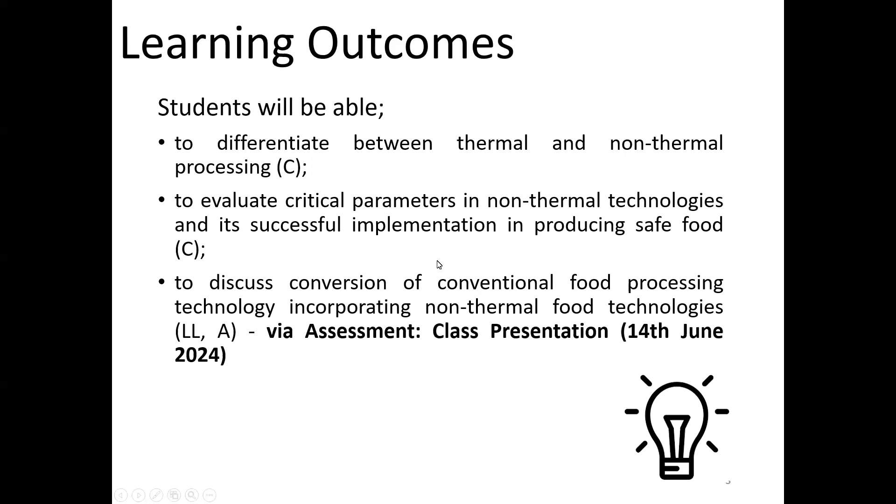Okay, so this will be done via assessment. I could share with you the presentation that you need to present on the 14th of June, which is basically the future outlook of non-thermal processing in Indonesia. Because I'm not quite familiar with the industry in Indonesia at the moment, it would be very good knowledge for me to understand how the food industry in Indonesia is and how you could implement non-thermal technology within conventional food technology.

Okay, so you have to choose first the non-thermal technology you would like to focus on, and what the important parameters would be. Then you have to give me a specific example. Let's say if you were looking into a juice factory or some other food industry, that you are able to convert from the conventional thermal technology into a non-thermal technology. So please also include a food processing flowchart. This would be very good.

I would be able to understand better, and you and your friends would also be able to understand better. And of course, you can relate the proposed technology to solving food security in Indonesia and how to promote this new technology to Indonesian consumers. So the class presentation is not on the 9th, it is going to be on the 14th.

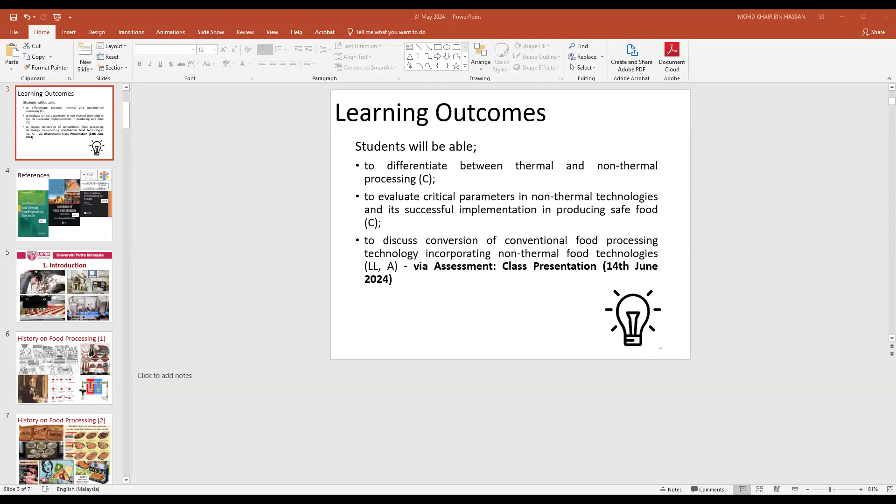For today, besides that, these are basically my references. The latest reference is the Handbook of Food Preservation by Mohammad Shafiur Rahman. It's the 3rd edition, so you could try to find it online and read it if you are able to. Other than that, I refer a lot to Prof. Chauhan's books on non-thermal food processing, and of course Enrique Ortega-Rivas. So these are my references.

So as an introduction, basically what you are looking at is the newest technology that we have in the food industry. But a disclaimer here: in Malaysia, the majority of owners in the food industry are small and medium enterprises, about 60 to 70%. So needless to say, small and medium industries use very conventional food processing.

They use simpler methods. They use a lot of cooking, because they lack the capacity or the financial ability to incorporate newer technology, and they also lack experts in this field. So what you are looking at is a lot of food industry in Western countries, especially the United States, which has incorporated non-thermal food processing. They invested a lot, they have the financial means and capital to invest in this technology, and of course, they have experts for it. Okay.

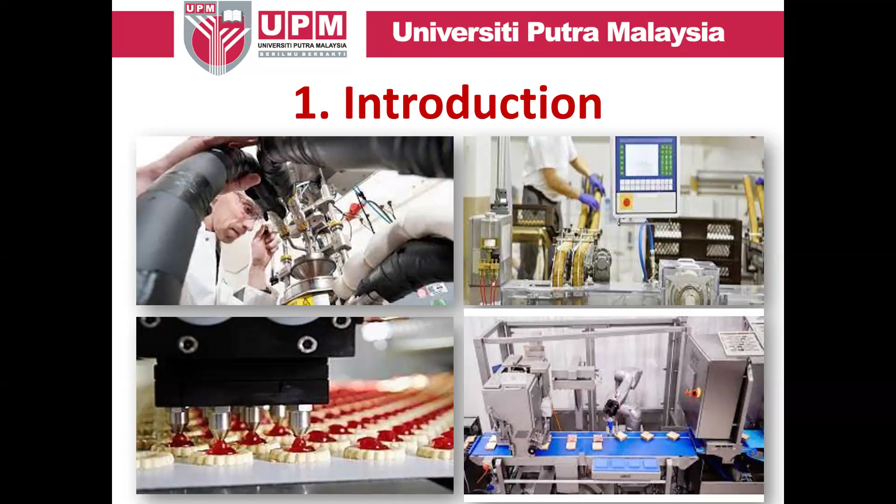Before we go any further, I would like to discuss a bit on the history of food processing. The origin of food processing may be placed in ancient Egypt, as shown by this figure. The writings on the wall show how they symbolize the history and culture of food processing. Basically they would use crude processing methods where you slaughter your animals and then perhaps sun dry them, or use salt, or fermentation. It's not only in Egyptian civilization but also in Roman civilization, Chaldean, China, and Greek civilization.

So modern food processing, as you can see this guy here - this is the grandfather of pasteurization, Louis Pasteur. He came up with the new technology of pasteurization of food, especially during the earliest invention which was on milk pasteurization. That is why you could see the word pasteurization usually connected to milk processing. This was actually found in 1862, so it's quite far off, right?

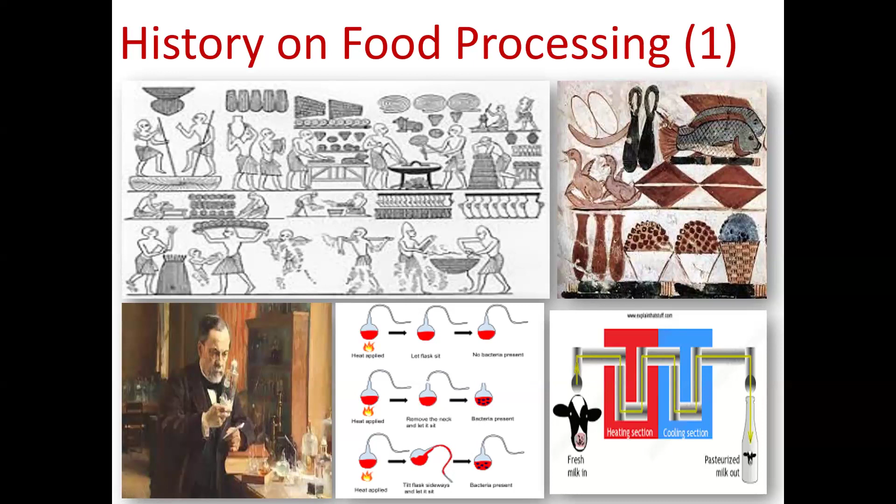And then of course we move into the advancement of the 21st century. You see a lot of pasteurization products. You see also ohmic processed food, eggs that are being pasteurized, although we sometimes wonder.

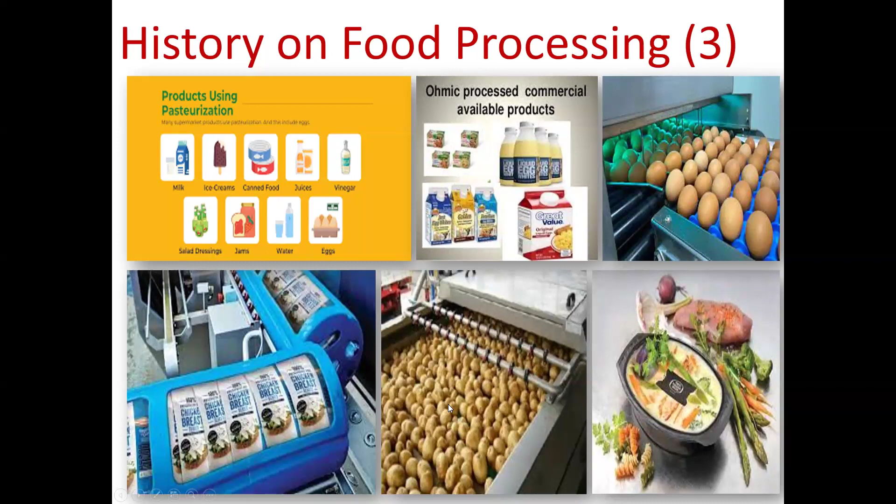And then this one here is actually a barrel vessel - we put in packaged product for HPP, or high pressure processing. And potatoes here are being treated with infrared, now with pulse electric field. So there's a lot of advancement that has been done.

So if you look at food pasteurization, the earliest forms of food pasteurization are basically using heat. So when we look at pasteurization techniques, there are three: low temperature pasteurization, high temperature pasteurization, and of course ultra pasteurization.

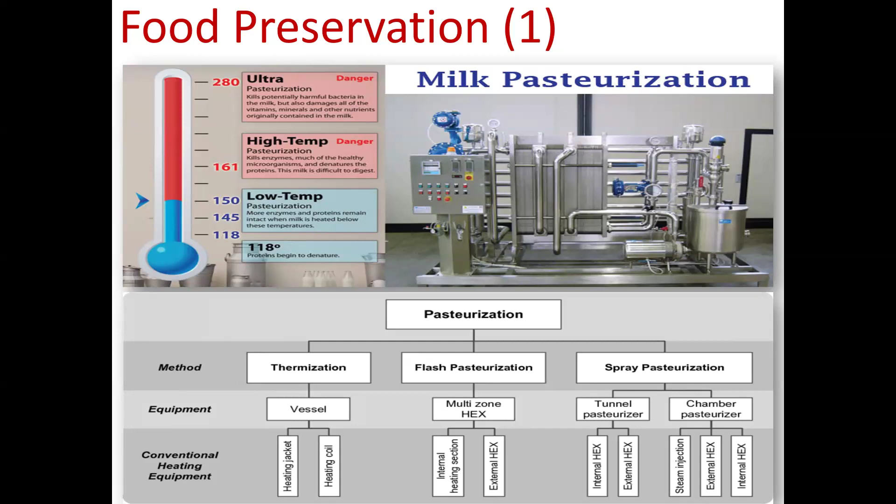Of course, when you look at ultra and high temperature, you would have safe food, but the nutritional quality of it is degrading. If you look at high temperature pasteurization, this milk is difficult to digest because the protein has been denatured, so your stomach cannot digest them. That is why newer technologies have come in to help with this pasteurization method.

If you look at food pasteurization methods, there are three major techniques. One is inhibition, meaning you kill all the microorganisms, you inhibit any growth of microorganism. Inactivation, you just kill them for a while, make it dormant to a minimal level, but still safe for food consumption.

And of course, if you want to avoid recontamination, you would have to have a very good food safety management system. The ones I'll be discussing for this week and next week's lectures are basically irradiation, electrifying measures, pressure treatment, light, sound, and of course the magnetic field.

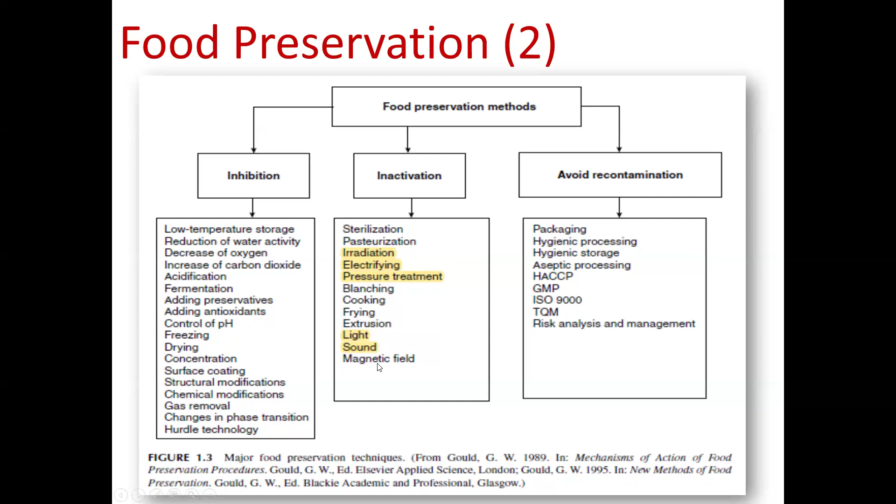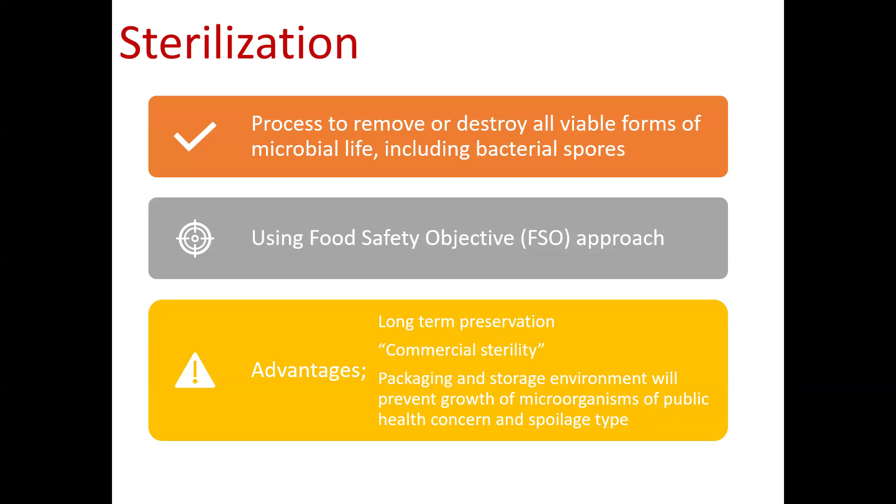So these are basically sterilization methods, to remove or destroy all viable forms of microbial life, including the bacterial spore. We have always used the food safety objective approach. Basically, after the sterilization methods, we test for any microbial growth.

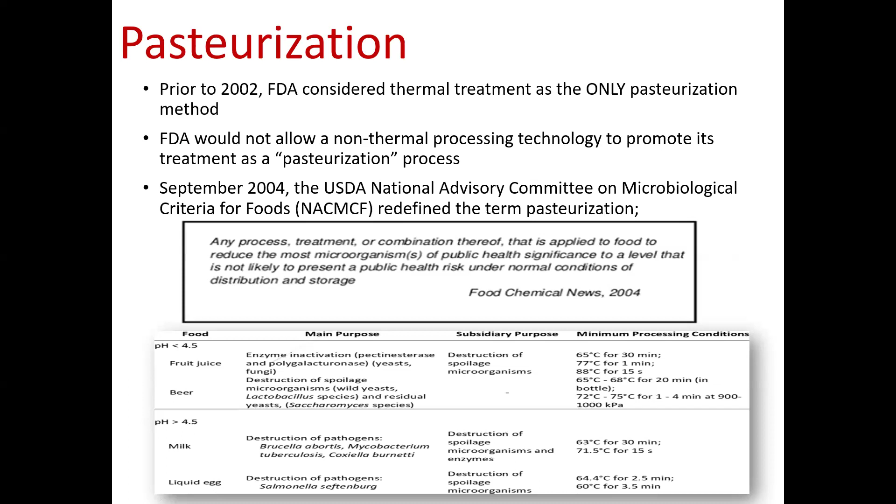So these are basically the pasteurization methods. Prior to 2002, only heat or thermal pasteurization was considered the only pasteurization method. But after that, they have considered non-thermal methods, such as ultraviolet, ozone, irradiation, and other types of pasteurization.

Ultimately, what we want is food that is safe, but the nutritional quality is still viable. We still want all the nutritional quality that is within the food itself. So less processed food is especially in demand nowadays, because our consumers are more educated, so they understand the nutritional quality better.

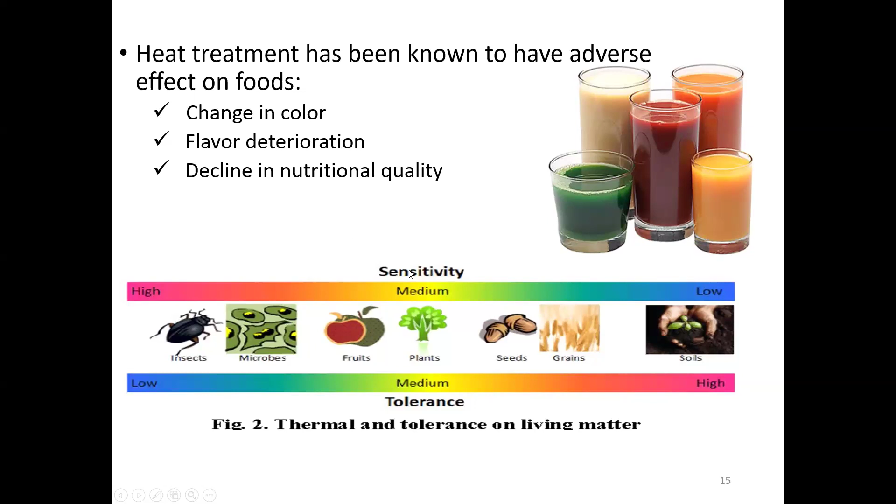And of course, you don't want any adverse effects. You would like your carrot juice to come out as orange as it was before. You don't want any change in color, any flavor deterioration, or decline in nutritional quality. That is always the issue with thermal treatment.

So functional food is a byproduct of this non-thermal approach. Sometimes we call it functional food because at times all these bioactive compounds are extracted together - that's a side effect of non-thermal processing. That's why non-thermal is the way to go now, because you not only produce safe food, you also retain the nutritional quality, but at times you can have extra nutritional benefits to your food.

So it is an increasing trend worldwide, even in Malaysia. Consumers are moving towards a better lifestyle and good health. When we look at the purchase intention of our consumers nowadays, they like to see the health part of the food, the perceived value they are buying, and the food safety concern.

That is why when food has a GMP logo, or a HACCP logo, those are seen as higher quality products, so that's why they would buy it. And of course, there's also the religious factor.

For this week's lecture, I will only be covering ohmic heating, infrared heating, and radio frequency. I will not be discussing microwave, but every now and then microwave will be included into the discussion as a comparison method to these methods.

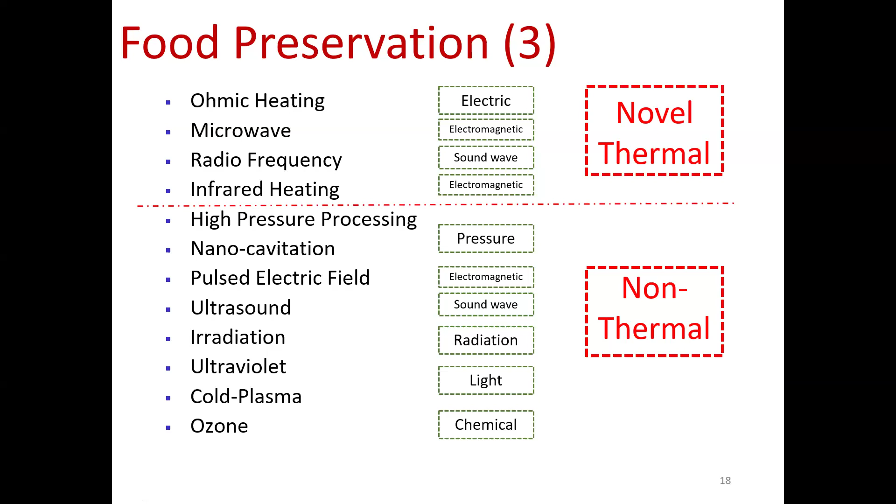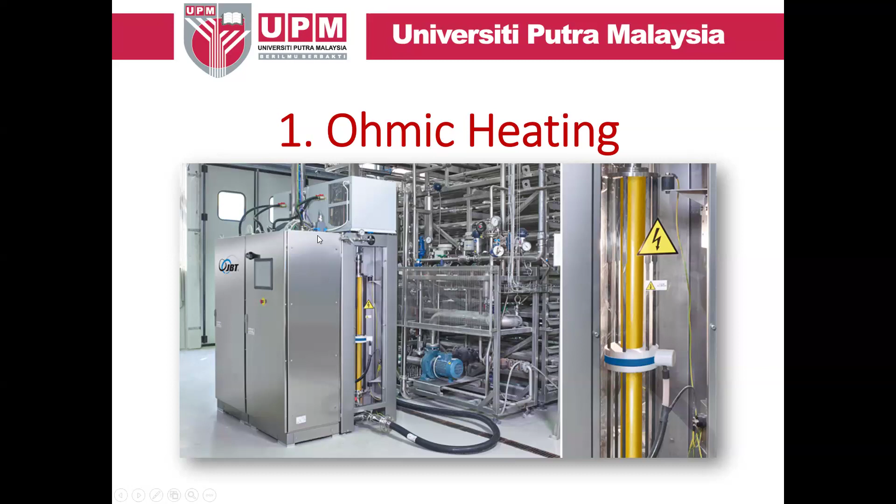So the first topic of the day is actually ohmic heating. This is the industrial setting of ohmic heating - basically this is the pipe, they will put the electrode here to treat your food products. If you look at all of this equipment, the very crucial part is only the yellow pipe here. That is how ohmic heating is used to treat your food product.

Before I go on any further, I would like to actually compare the heating methods. If you look at the conventional heating method, the energy is transferred through the wall of the reaction vessel.

If you were to have your pans, your cooking pots, you put them on top of your gas, and it will emit fire. The fire is actually heat energy that will be transferred from the fire itself to your cooking pots, the wall of your cooking pots, and then the energy itself will dissipate through your food product.

That is a very direct heating method. But if you look at microwave irradiation or microwave heating, it's basically the direct and internal absorption of microwave radiation by the molecules itself. So that is why your food product needs to have water in it, for it to be able to absorb all this microwave energy and for it to dissipate in terms of heat.

If you look at the inductive method, this is the induction method, which is basically what we call an indirect heating method. You would have an alternating field, alternating current, or alternating electric current field, and then it will produce heat that goes to the wall of your cooking pot. So in comparison, conventional is considered a direct heating method, induction is considered indirect heating.

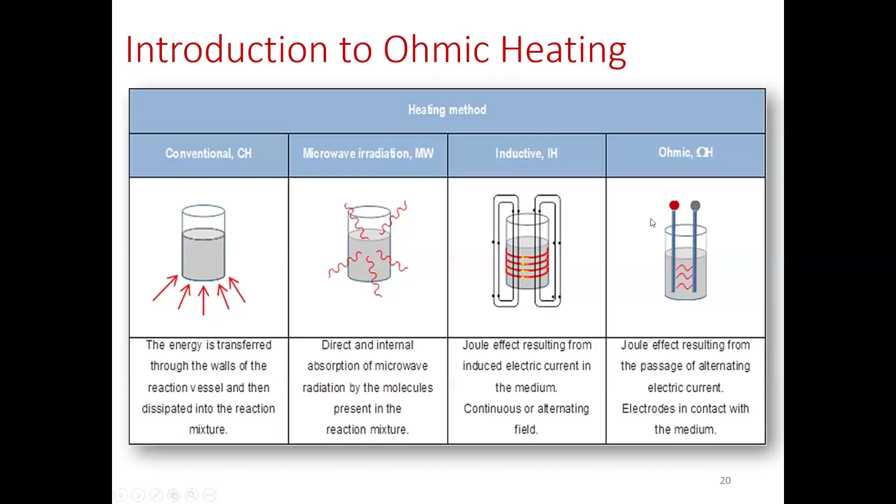The advantages of ohmic heating is that it's most often used for a liquid product. Let's say you're cooking chicken curry, or if you want to heat up your pot of water, it's very good to use ohmic heating, where the electric currents can be generated and passed through your food, so that heat can uniformly go to every molecule of your food product.

Temperatures are sufficient, and it can also produce ultra high temperature, but without the degradation of nutritional values, just like the ultra high temperature method does. That's why ohmic heating is much preferable in comparison to UHT.

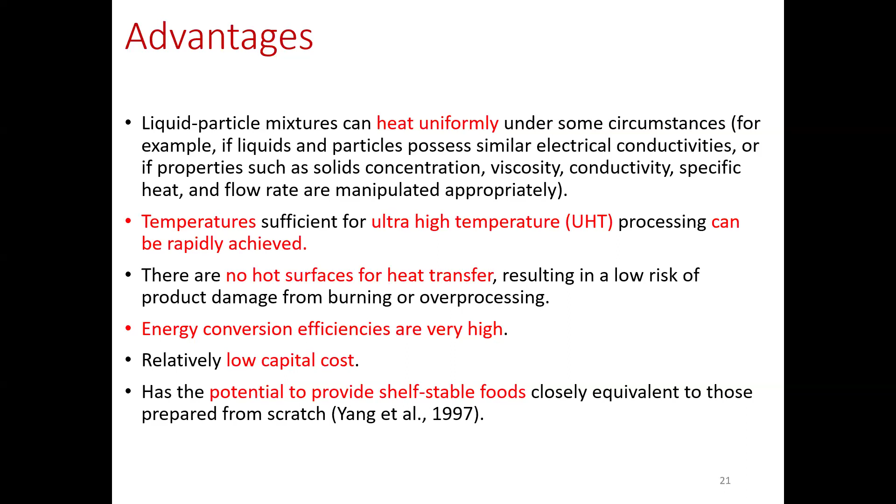No hot surfaces. If you were to compare to microwave, most often you would have cold spots in your microwave food product, but using ohmic heating, you would have sufficient and uniform heating, resulting in a low risk of product damage from burning or over-processing. The energy conversion efficiencies are very high, you have relatively low capital costs, and it has the potential to provide shelf stable food.

How to design ohmic heating? Basically you need to have two electrodes, a power source, and of course a means to confine food samples. So basically you either have a vessel, cooking pots, anything, so you can use it.

Important design consideration: you need to have an electrode configuration. Let's say you look at this figure on the right here, you would have two electrodes. If the electrodes are moving closer to the middle part of the food, everything in the middle part would have a very high efficiency rate, so the heating rate will be higher and faster. That's why electrode configuration is very important.

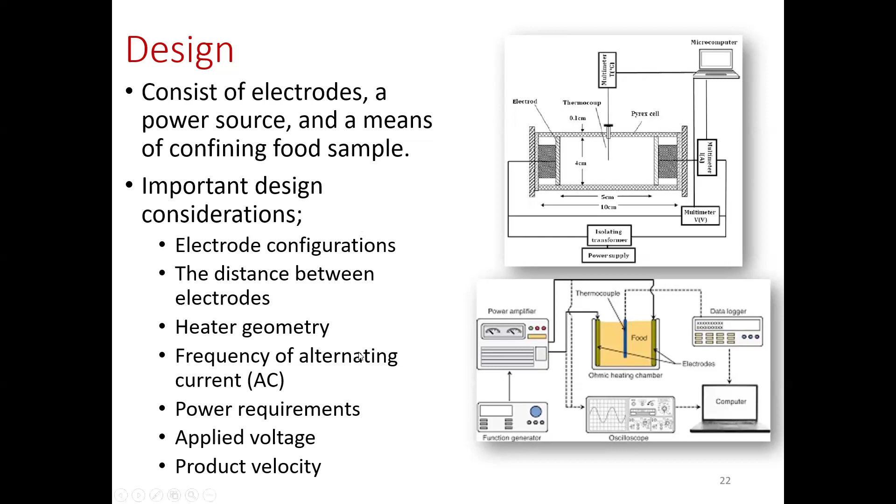The distance between these two electrodes, the heater geometry - you could have maybe instead of two, maybe four, or maybe six if your pots are very big in dimension. Other than that, the frequency, the power, and the voltage of your electricity generator would be very important. And it's not product velocity, it's actually product viscosity - the thickness or viscosity of your product will play a very important role in making sure you have an efficient heating method.

Important parameters, as I've mentioned before: product properties, electrical conductivity - these are very important - density, specific heat, and of course the viscosity. Type of product matters too: liquid would fare much better with ohmic heating in comparison to solid, because you need very good electrical conductivity, so your food should be able to move the electrical current within itself. That's why ionic components, salt components, and water components are important in your food product for the electric current to move about.

Fats, lipids, and alcohol will decrease the efficiency, or will decrease the electrical conductivity of your food.

So electrical conductivity is linearly correlated with temperature. So when you have a very high electrical conductivity, you will also have a very high temperature. But by lowering the frequency of alternating current, you can also increase the electrical conductivity of your food.

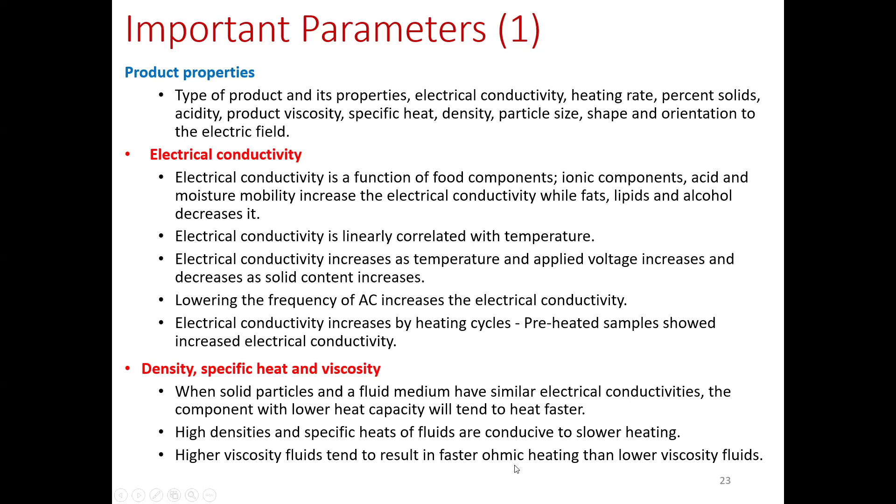Okay, so when solid particles and fluid medium have a similar electrical conductivity, the component with lower heat capacity will tend to heat faster. So let's say if you were to have tomato sauce and water, water would have a very high electrical conductivity, so it will heat up very fast in comparison to your tomato sauce. So high density and specific heat of fluids are conducive to slower heating, and higher viscosity fluid tends to result in faster ohmic heating than lower viscosity fluid.

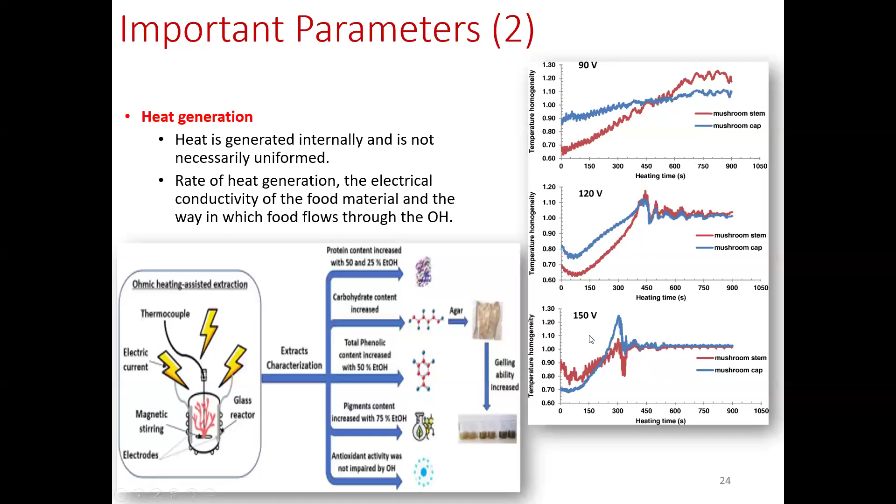Right. So this is one example, if you want to look at the heat generation. This one is at 90 volt, this one is at 120 volt, and this one is at 150 volt. You could see at 90 volt, the increment of temperature or the temperature homogeneity is a bit constant and a bit slow moving. But when you have a higher voltage, about 120 volt, there's a peak over here and it's quite fast. And if you were to compare 120 and 150, this one is much faster. So if you want a faster heating rate, then you need to increase your voltage, right?

So how do we do this? Actually, how to make sure your ohmic heating is homogeneous or uniform heating is basically by modeling it. This is by using a computational fluid dynamics software. So you could see whether there's a cold spot or not.

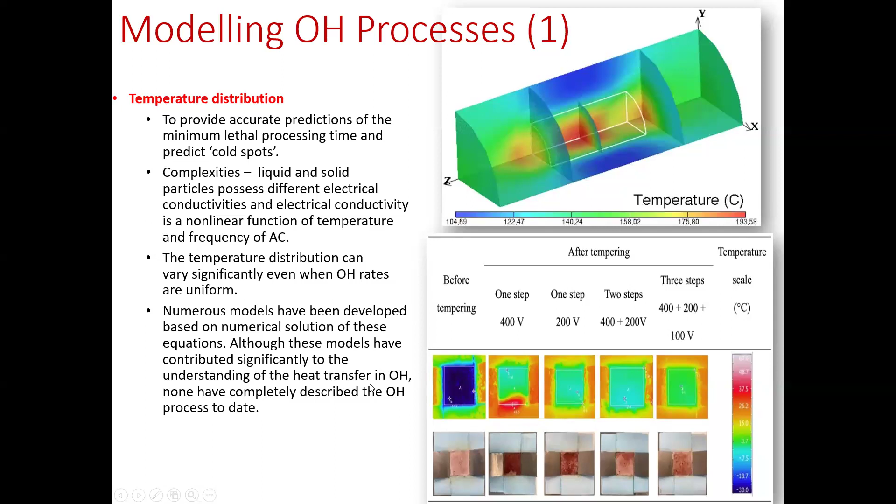So the complexity of ohmic heating, the issue is that if you were to have food that has different electrical conductivity, then you would have an issue of getting a uniform heating, right? So numerous models have been developed, but the understanding of how ohmic heating plays a role in your food cooking is still very small. Okay, so we need a lot more research to do.

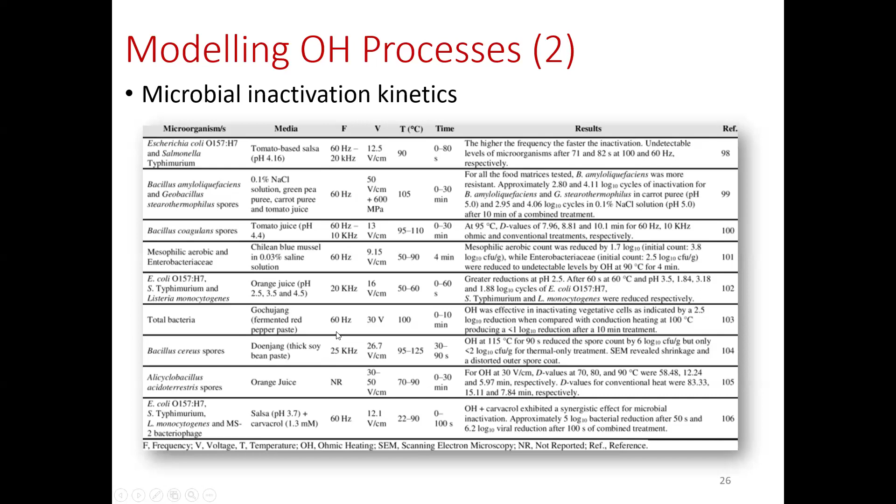Okay. The very important thing is to also eliminate any electrolysis. Electrolysis is actually what happens with ohmic heating at a high voltage. The electric current itself can cause electrolysis. So electrolysis involves movement of ions towards electrodes of opposite charge. So cations towards the cathode, and anions toward the anode, right? So the cation is actually the positive charge and the anion is the negative charge.

So when the electric current passes through the food, which contains water and dissolved salt, these components can undergo electrolysis, resulting in chemical reactions at the electrodes. So the issue here is that it can lead to chemical changes in food. It can affect the flavor, the color, nutritional value. The issue is oxidative, okay?

So usually at the anode stage here, it can produce oxygen that can cause lipid oxidation. And the cathode itself can sometimes produce hydrogen ions. And this will also affect the taste of your food product. So electrolysis can generate potentially harmful substances such as chlorine from salt, if not properly controlled. Electrolysis can also lead to degradation of electrodes that can contaminate your food with electrode material.

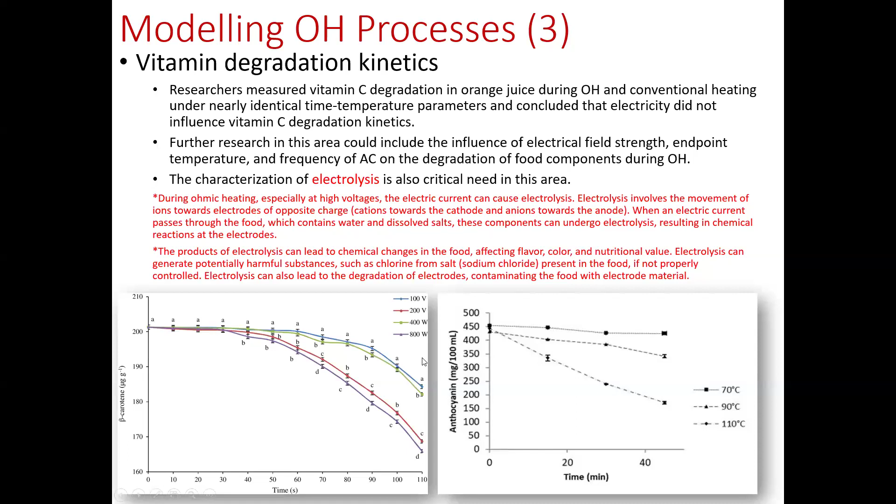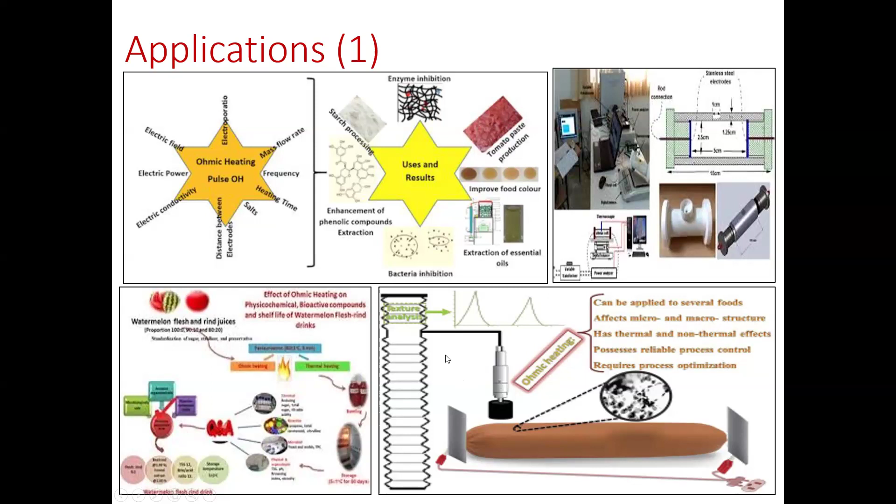And another usage of ohmic is you can use it as a sensor. So in this product, let's say if you were to have a sausage here, it can be applied to several foods and can affect the micro and macro structure of your food. So this can be detectable using texture analysis. Okay.

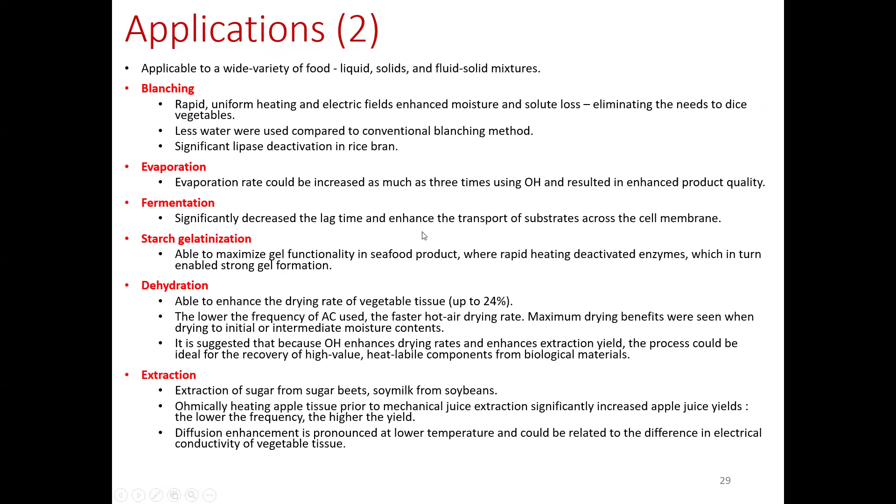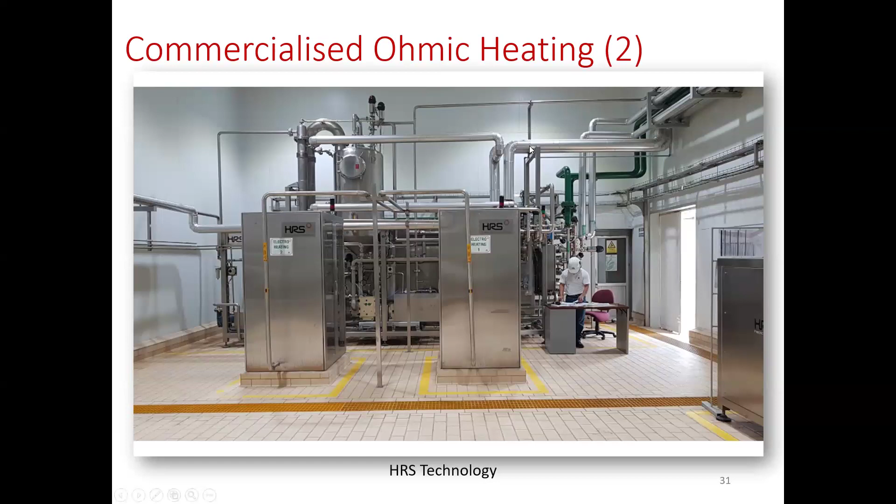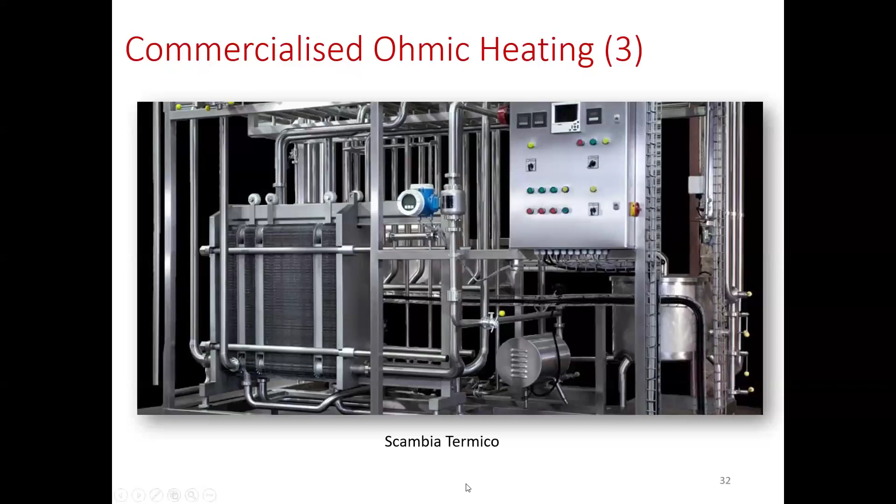Okay, and the future research direction is basically you need to find the optimized temperature and heating time. And of course, you also need to develop temperature measurement that is non-invasive and does not interfere with the electric current. The issue now is the data logger of your temperature measurement. You cannot put it directly inside your cooking vessel when the electrodes are producing electrical current. Basically you would get an electrical shock.

So the issue is internal monitoring. We want to know the internal temperature. That is why modeling is very important now, but this is only a simulation. So you need to also develop models that correlate process parameters with the desired properties of the product, and to standardize ohmic heating.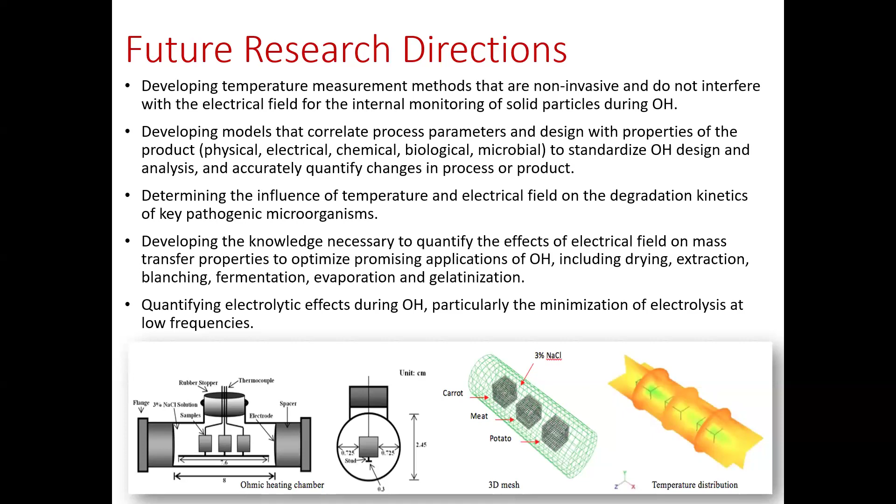And to determine the influence of temperature and electrical field on the key pathogenic microorganisms, and of course to develop knowledge necessary to quantify effects of electrical field on mass transfer. And you need to also identify if there's any electrolysis that happens during the treatment of your food product.

Okay, so the second subtopic for today is infrared heating. So what is infrared actually? Infrared uses electromagnetic waves. An electromagnetic wave looks something like this. You would have an electric field and it produces a magnetic field. That's why it is named electromagnetic. Based on the electrical current, it produces a magnetic field. Okay, so it is highly energy efficient.

It uses less water and of course is very environmentally friendly in comparison to conventional heating. It is characterized by uniform heating, high heat transfer rate, low heating time, low energy consumption, improved product quality, and of course, food safety. And infrared is used in a lot of food manufacturing processes such as drying, boiling, heating, peeling, polyphenol recovery, freeze drying, antioxidant recovery, microbiological inhibition, sterilization of grains, bread, roasting of food, manufacturing of juice, and of course, cooking of your food.

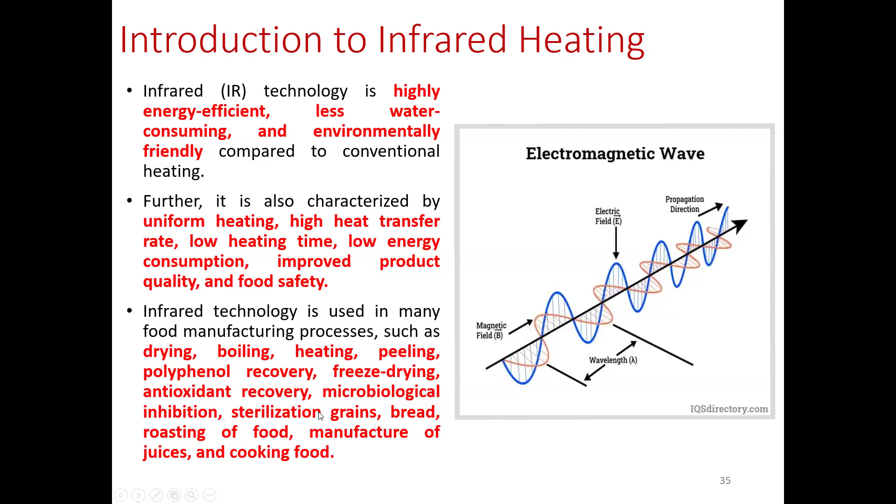So what is in the electromagnetic spectrum? If you look at this spectrum here, radio is somewhere around here. It has a long wavelength, so it has a very low frequency, and it produces low energy. But as you move further up to the gamma ray, this has a very short wavelength, because you can see the gap is closer to each other, and it produces very high energy and of course high frequency.

So where is infrared? Infrared is here. This is microwave. So infrared basically has a shorter wavelength in comparison to microwave. It has a higher energy and of course a bit higher frequency also. So if you were to compare ultraviolet, infrared, and microwave.

So basically with microwave, the ions or the water molecules inside the food product will rotate about each other. It would absorb radiation from the microwave itself, and then it produces high energy so that your product will move up and down and move about in your microwave. But for infrared, the water molecules only vibrate. Although it has higher energy in comparison to microwave, the vibration of this molecule produces higher energy.

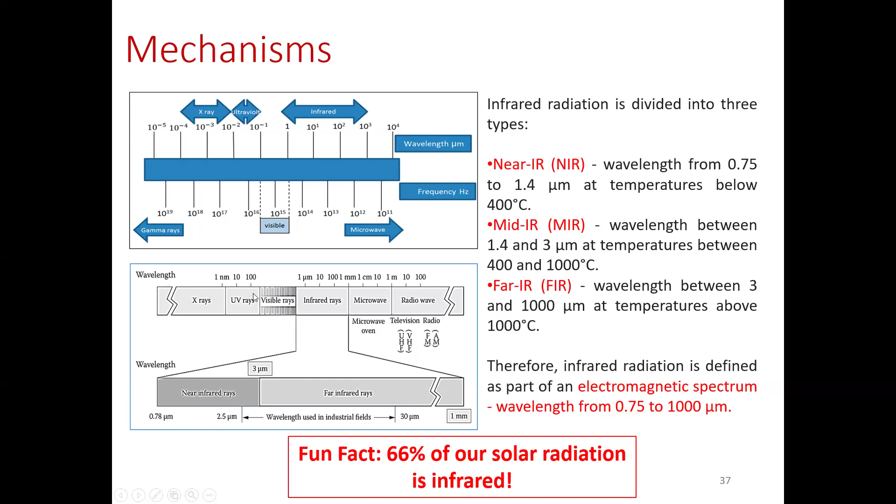So one fun fact is that 66% of our solar radiation is actually infrared. So what we are absorbing is basically infrared. And the rest, 34% of our solar radiation, is actually the visible ray and the UV ray. Okay.

So the mechanism is that the infrared will penetrate your food product, and then whatever water is inside your food product will vibrate. The vibration movement of your water molecules at a frequency of about 60,000 to 150,000 megahertz can cause heating. So the vibration of that movement of water will cause heating. Basically, what you will see is an increment of temperature, but it's not as high as microwave.

So electromagnetic radiation causes thermal movement of the molecules, but conversion efficiency is highly dependent on the frequency. That can cause electron chemical changes in radiation absorbing molecules, such as chemical bonding, electronic excitation, and dissipation of absorbed energy in the form of less heat. So what it is trying to say is that although you would have an increment of temperature, because of the vibration of the water molecules, as soon as it absorbs the heat, it will of course dissipate the heat.

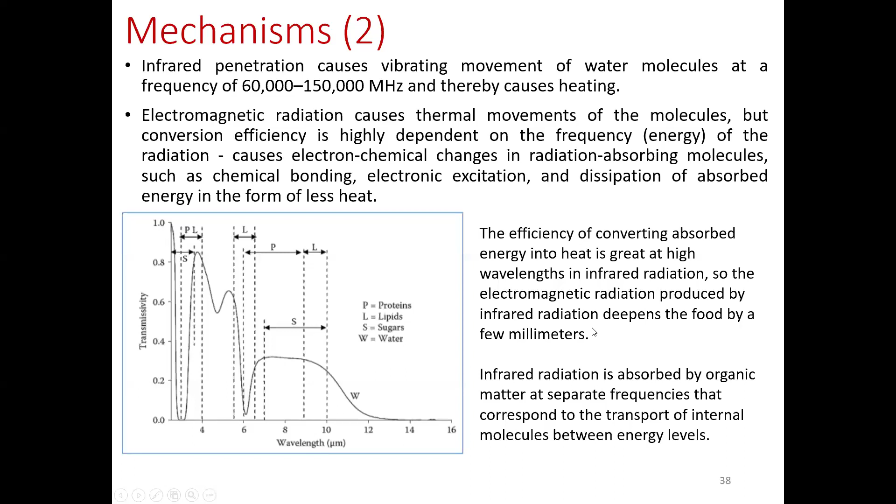So the efficiency of converting absorbed energy into heat is very great at high wavelength in infrared radiation. So electromagnetic radiation produced by infrared penetrates the food by a few millimeters in comparison to the microwave. If you could see here, if you have more water in your food product, it would absorb more. And as you have lipids, sugars, protein, protein has the highest, I think, absorption rate of wavelength, right? So strong absorption is due to the longitudinal vibration. Longitudinal means vertical vibration, up and down, up and down.

The radiation absorption of the material is not saturated, although it is still considered radiation, meaning whatever radiation is being absorbed by the water molecule, as I've mentioned before, as soon as it absorbs, it will dissipate to the environment as soon as possible. So it will transfer the energy to the surrounding environment. So it is only absorbed by a thin layer of organic matter and water. So heating is superficial, it's only on the surface of it.

So the process of infrared heating is faster because energy is transferred from the heating source to the food simultaneously. Therefore, you don't need any extra usage of hot air. So you don't need any transfer of your heat. Basically, water molecules will absorb and then release the heat.

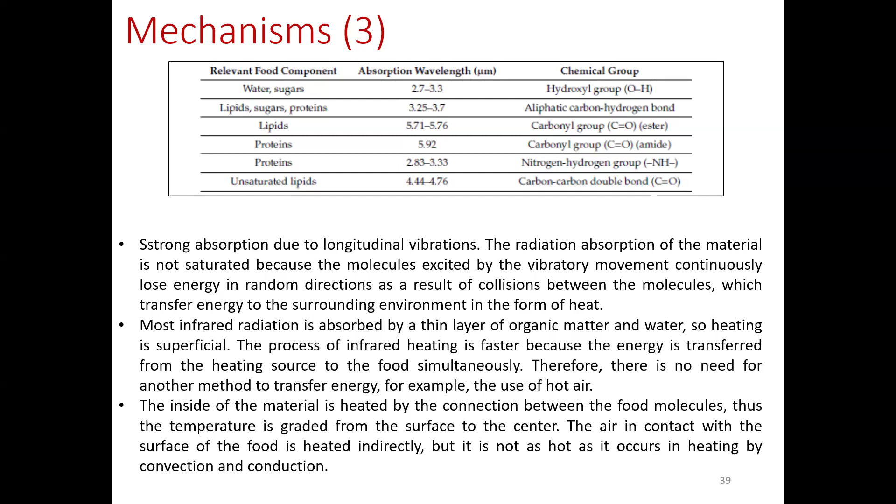Okay. So the advantages of it are basically, as I've mentioned before, highly energy efficient, less water consuming, environmentally friendly, very low energy cost, and the size of the infrared equipment is often very small, and the thermal efficiency is very high, so it is considered a valuable energy source. And as I've mentioned before, since the radiation is not saturated within your food product or the food molecules, it does not have enough energy to damage any DNA of your food. So you do not need to worry if you were to consume any infrared food.

So the energy is directly concentrated on the material to be heated and does not produce any volatile organic compounds, carbon monoxide, or nitrogen oxides. It does not need any heat recycling and does not need an isolated system. So basically, it preserves the vitamins, has very little flavor loss and no heating of the surrounding air. So it's very safe to use.

Okay, so the US FDA, the United States Food and Drug Administration, has indicated that infrared radiation can be used in food processing and it is not considered ionizing, right? And it improves the quality of the treated product, improves the safety, and reduces the consumption of chemicals and water, and of course improves the manufacturing efficiency.

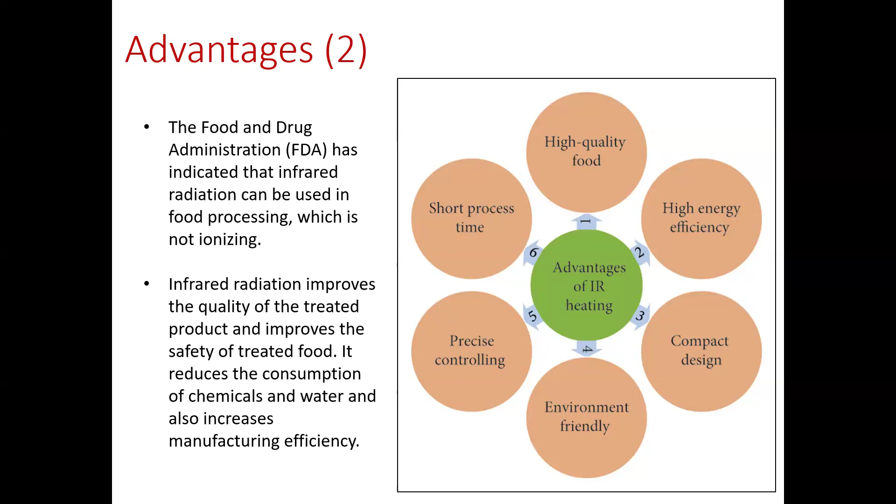Okay, so there are two traditional sources. One is the electric heater and another one is the gas heater. So the one that is very good for your usage is, of course, the electric heater, because it has a widespread wavelength, ease of control, fast heating rate, and clean energy. So the infrared that is produced is more flexible, and you can use it for any particular application. And infrared radiation can also emit wavelengths ranging from short to long depending on the voltage applied.

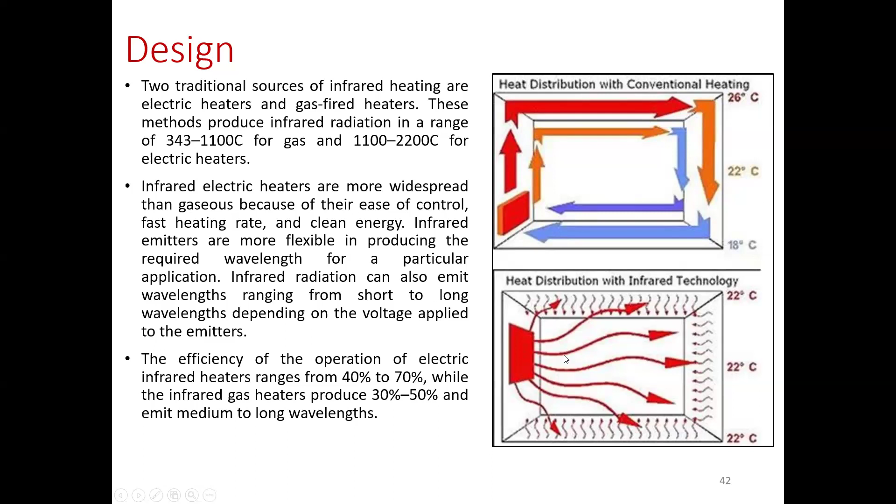So infrared radiation is produced by an electric heater by passing an electrical current through a high resistance wire such as nichrome wire, iron chromium wire, or tungsten filament. So at the moment, they have produced what they call lighting, a light that can emit infrared wavelengths. So incandescent lamps that emit infrared radiation are classified as short wave emitters, quartz tubes are classified as medium, and resistant elements are classified as long wave emitters.

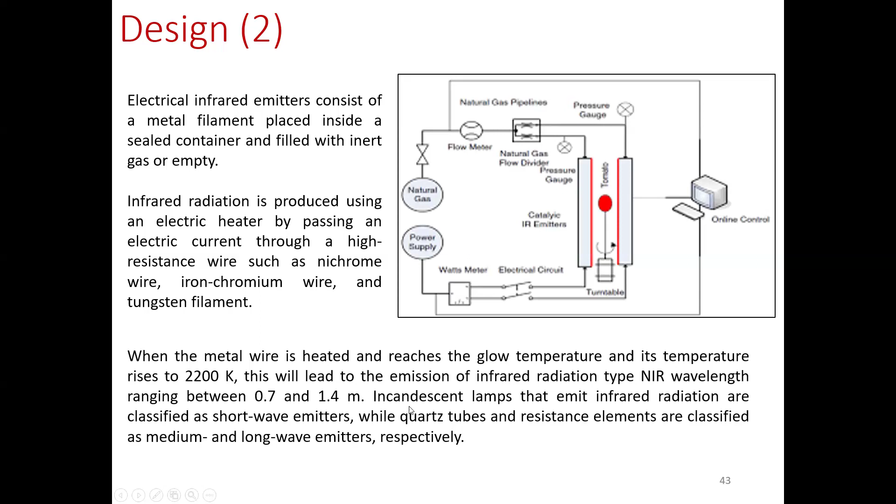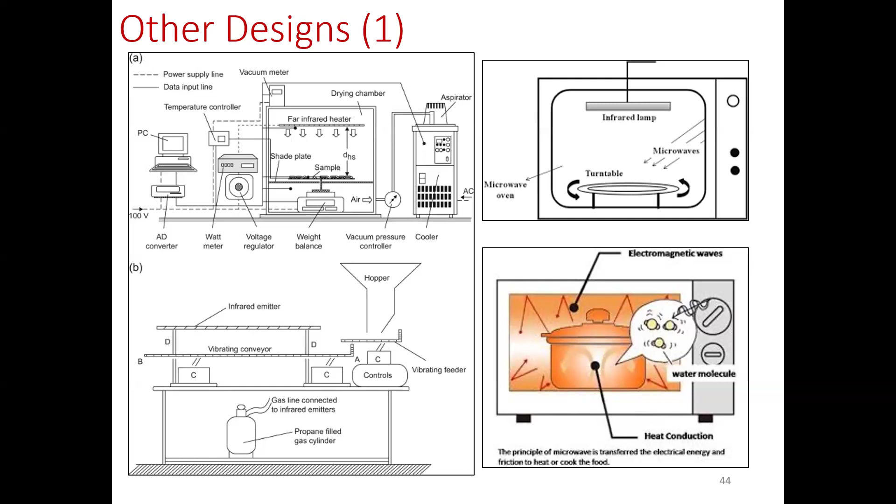Okay, so these are some of the examples, right? This one is the principle of microwave heating. So you basically have microwave radiation that goes inside your food product, and it excites the water molecules. But for infrared, it looks something like this. If you want to use it in an industrial setting, you could also do it like this. You can use gas, you would have a vibrating conveyor, and the infrared can be emitted from the top. In the United States now, they are using infrared for decontamination of apples, oranges, and agricultural products.

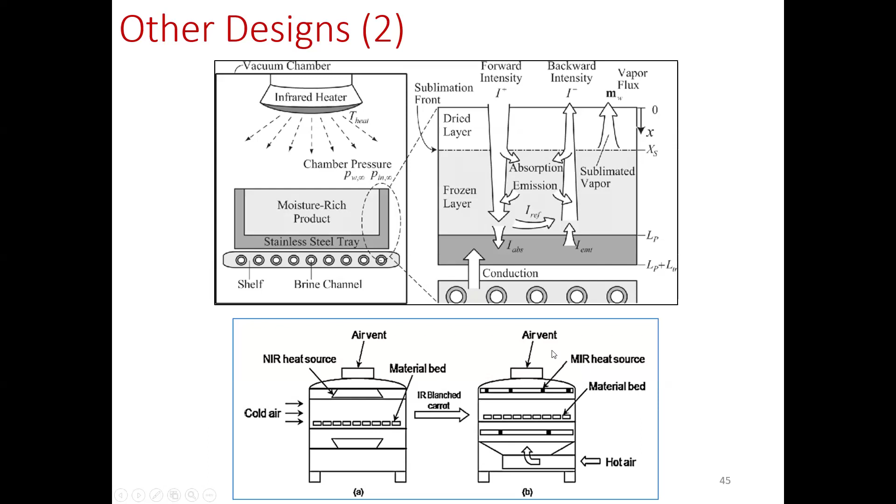Okay, so another design, same thing. Let's say you have a moisture rich product, like pickles, for instance. You would have a stainless steel tray here. The infrared heater will come from above, and then it will treat your product. So this is one design. This one uses near infrared for blanched carrot. And this one is the medium infrared heat source to dry the blanched carrot. Okay, important parameters. You need to remember that the radiation is actually separated into three categories.

Okay, so one is irradiation, one is the reflected radiation, and one is the transmitted. Basically, transmitted is the absorbed radiation, reflected is scattering of radiation, and irradiation is what we call the ionizing radiation itself. So for you to calculate them, basically you need to calculate the reflected radiation R plus A, the absorbed radiation, and of course the transmitted radiation.

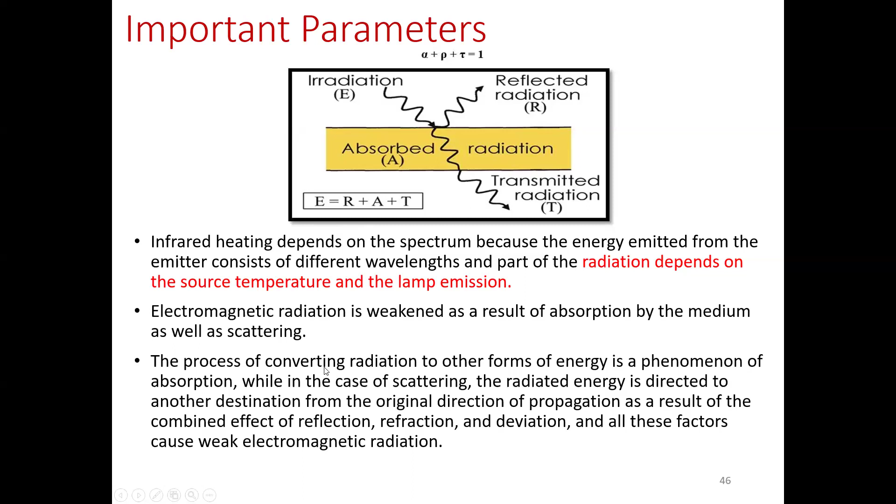So infrared heating depends on the spectrum, because energy emitted from the emitter consists of different wavelengths, and part of the radiation depends on the source temperature and of course the lamp emission. So electromagnetic radiation is weakened as a result of absorption by the medium as well as the scattering radiation. Okay, so dissipation of radiant energy in form of heat produces a warming of the surface of the food.

And of course, penetration depth depends on the thickness of your product, the water activity, the product component, and the wavelength of the infrared radiation. So infrared absorption is differentiated depending on protein, fat, carbohydrates, and water content. Okay, and another thing is that it depends on the shape and the sizes.

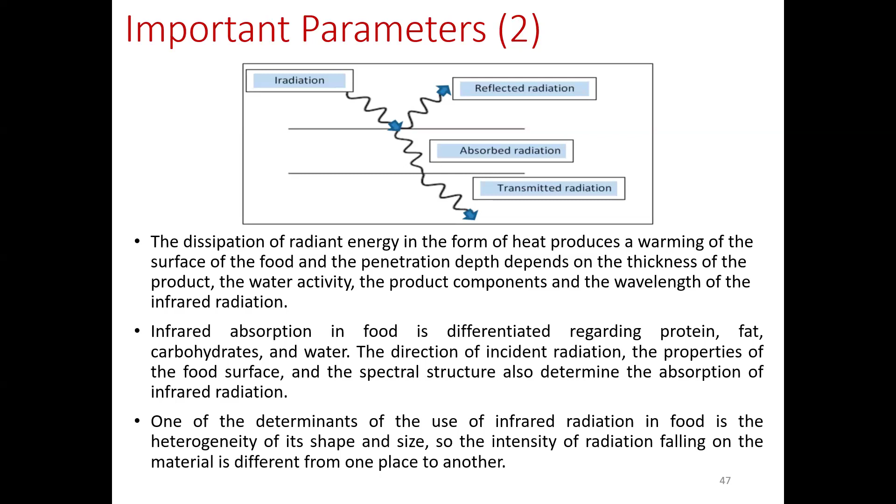For instance, the example that I mentioned before, in the United States they use infrared to decontaminate apples. So all the apples have to be homogeneous in terms of size. Okay, you cannot have small, big, small, big. They all need to have the same size for the infrared to be efficient and homogeneous.

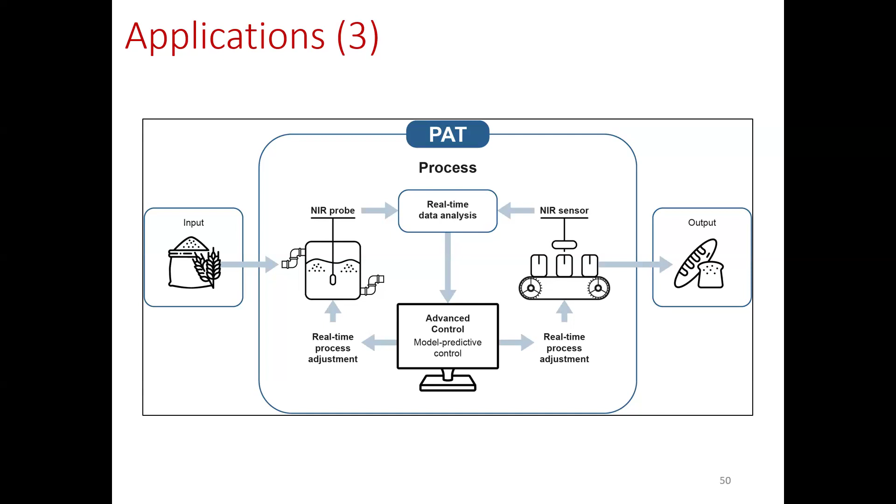Okay, another application of infrared is you can use it as a sensor. So this is one of the applications of it. So basically you would have your rice grains, and then you would put a near infrared probe. So this would come out in terms of a sensor that will be reflected on your computer screen, and it will come up with the results of the characteristics of your rice itself.

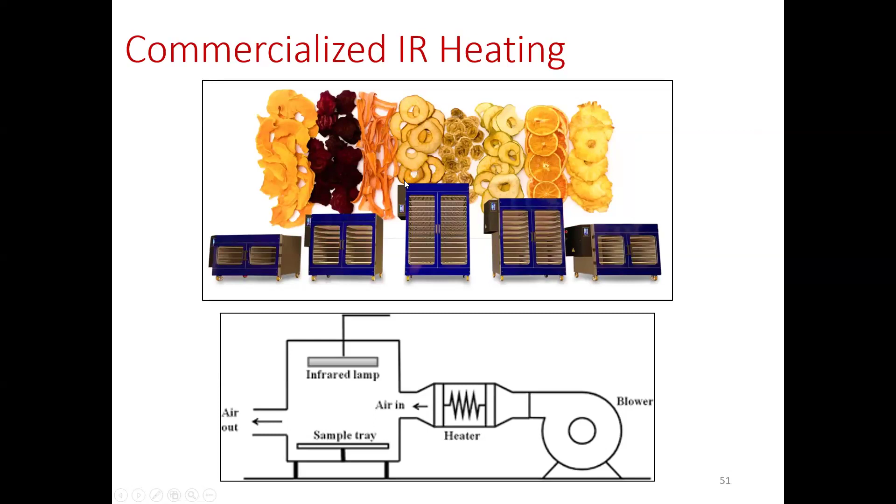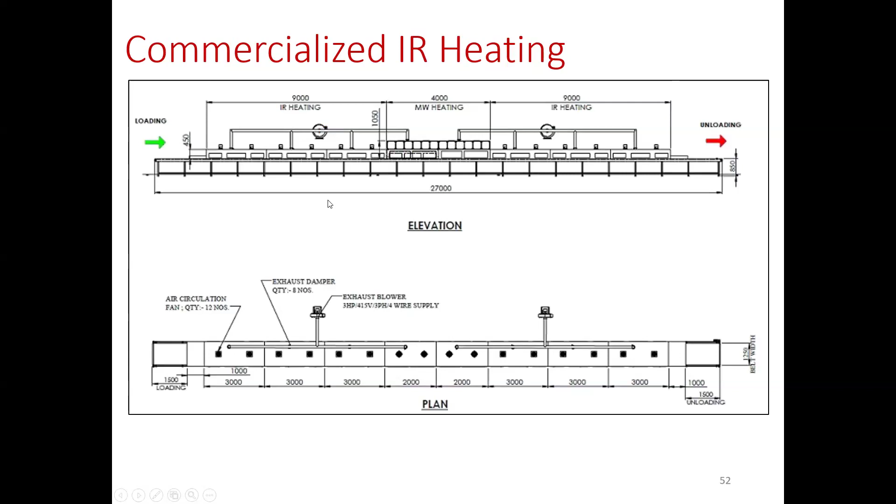Okay, so these are some of the commercialized infrared heating. So this is what we call a tray infrared heating. So it's for dehydration of your fruit product. This is some of it. So this one combines microwave heating and also infrared heating. Okay. So this is what it looks like. It's a tunnel. So you put your product in from one end, it will come out the other end.

So future research direction. It will be exploited to extract essential oil, distillation of water, and heating food by continuous method. And basically, we can also combine it with magnetic, ultrasonic, thermal, not just microwave heating. And infrared can be desirable to sterilize food packaging with transparent packaging, and you need to study the integration of radiation with refractance window drying for the purpose of increasing energy efficiency.

Right. I think I have about 20 more slides. Okay.

Okay, radio frequency heating is basically also known as dielectric loss heating or dielectric heating. Radio frequency is between 10 to 50 megahertz. It is one of the most important promising modern heating techniques. Radio frequency is a heat source that was first described in the middle of the 20th century and was used to melt frozen food and to process and preserve meat product. So the longer wavelength of radio frequency in comparison to microwave makes it able to penetrate further into the food product, resulting in more even heating.

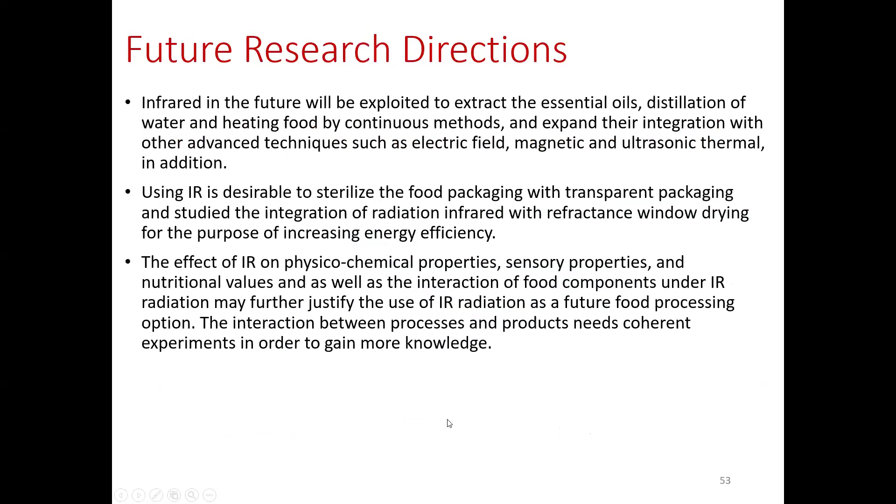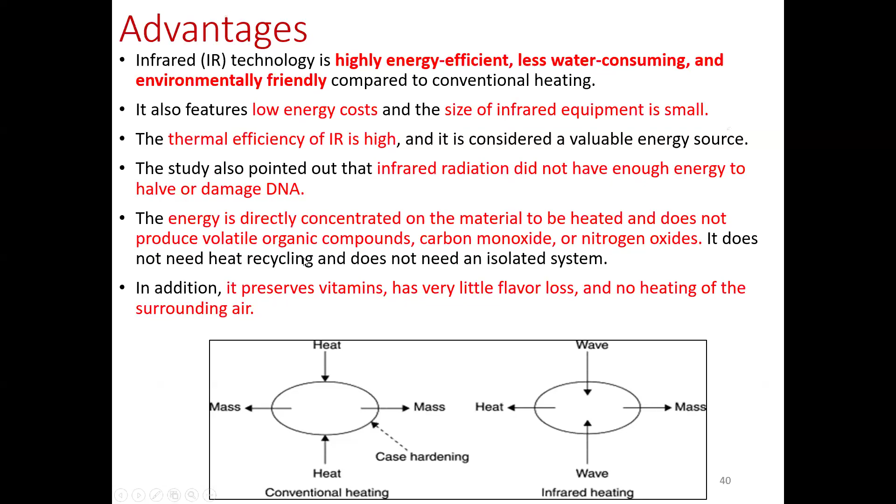Electromagnetic heating is characterized by the ability to generate heat inside the food material by polarizing polar molecules. It uses the water molecules inside the food product to heat it up. The water molecule absorbs the energy, then vibrates and moves about because it has higher energy.

Basically, it eliminates the limits imposed by conventional heating. Electromagnetic heating is relatively quick, as the heat is generated within the product without the need for heat transfer, in contrast to conventional heating.

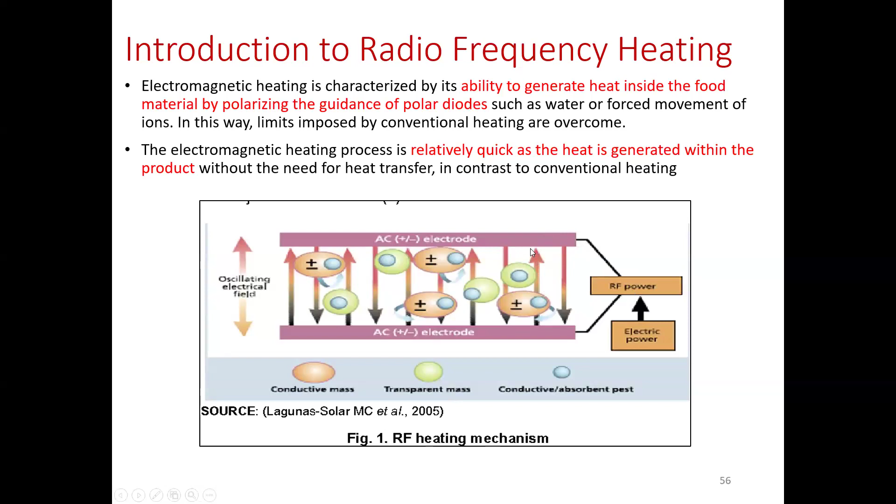You would have an electrode, with RF power or radio frequency generated by electrical power. The water molecules inside your food product would oscillate and vibrate. When your food product, which has polar molecules such as water, is exposed to an alternating electric field, dielectric heating occurs.

The polar molecule has electric dipole moments and will align to the electric field. If you look at this, you have two electrodes. Imagine this represents all the water molecules inside your food product. Since it has absorbed the energy, it will orient itself or reposition itself. This is what we call dipole rotation.

The positive moves to the negative electrode, and the negative moves to the positive electrode. The red molecules here represent ionic conductivity, which I mentioned in the microwave heating techniques. Basically, it's the oscillating movement of ions moving forward and backward in the material, generating heat due to friction.

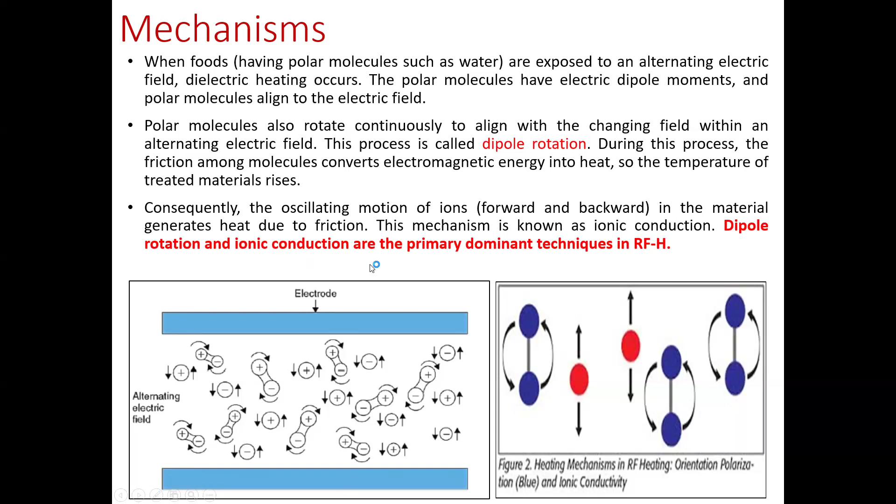So for radio frequency, you have two mechanisms: one is dipole rotation, and another is ionic conduction. Radio frequency heating presents multiple characteristics compared to conventional heat transfer. It is very important that the electrodes do not contact the food directly when using radio frequency, to avoid formation of Joule heating.

Remember, before this we mentioned ohmic heating, where the electrodes are submerged into the food product. In this case, it's not submerged, but instead placed outside the food product. The technique can be applied to both liquid and solid food.

It has been shown that the radio frequency wavelength is greater than the microwave frequency. Because of that, the capacity of radio frequency power to penetrate deeper into food is higher than conventional microwave, since the heat generated inside the food is uniform and distributed evenly. Previous studies have shown that the longer wavelength used in radio frequency heating does not result in interference or negative effects inside the food, whereas the use of microwave has led to patterns of cold spots inside food items.

The best part about radio frequency is that the construction of large-scale radio frequency systems is easier, and it improves the quality of the final product because of higher energy usage efficiency. RF units are also typically less expensive than microwave and incur lower maintenance costs.

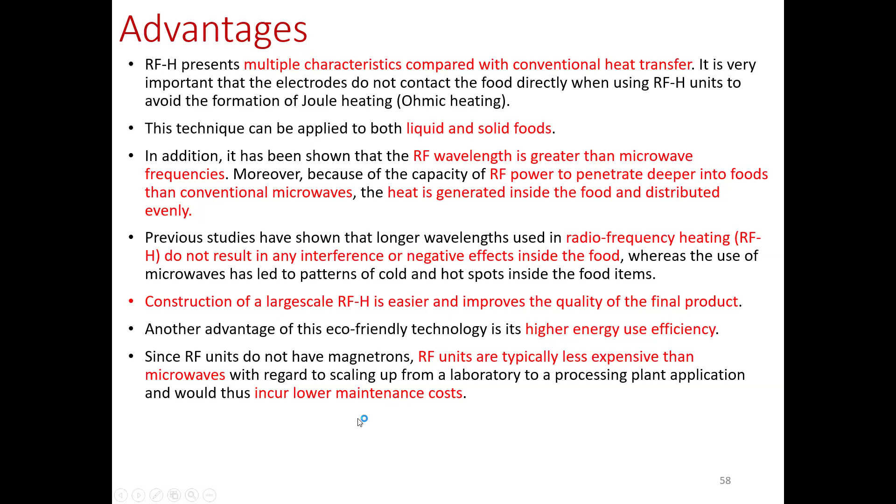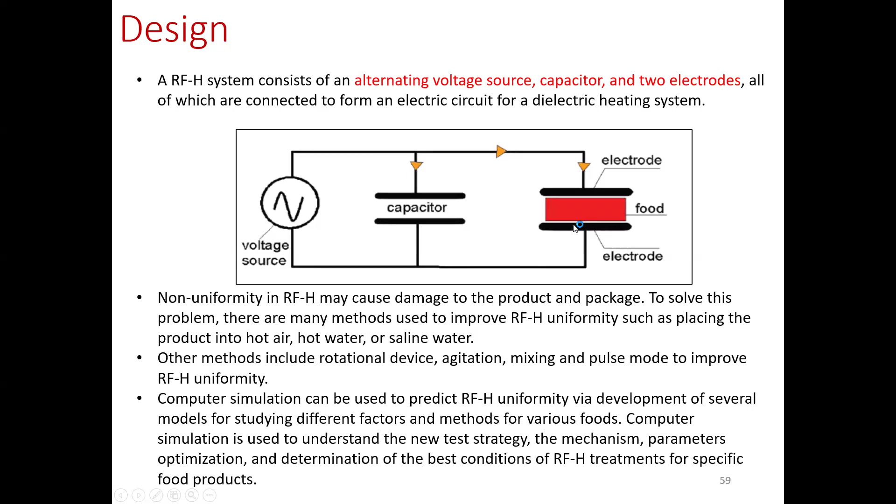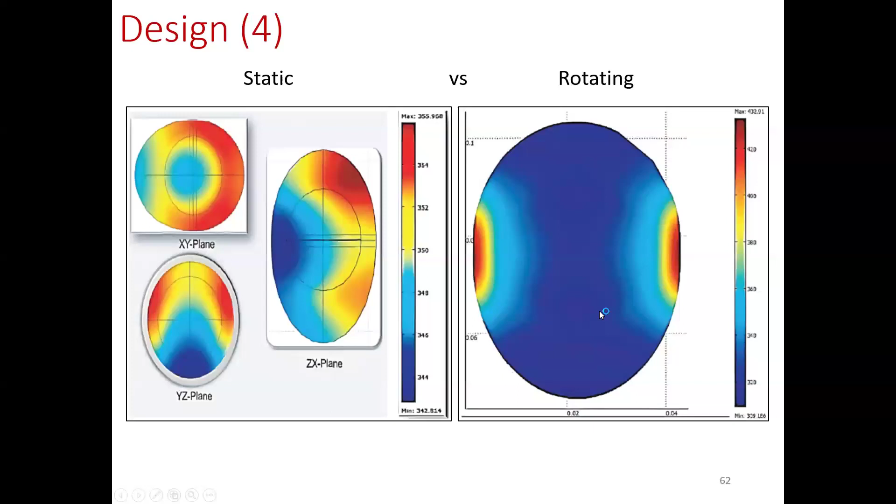This is what one study has shown, using a potato. If you use a static potato that is not moving, you would get cold spots and hot spots. But if the potato is rotating, you get an evenly distributed heat generation inside the potato.

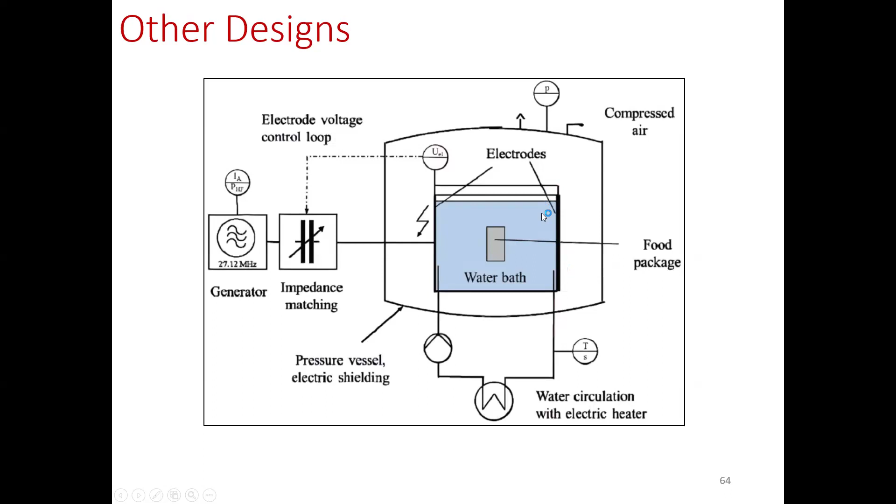This is one of the experiments done on white pudding. Basically, they placed two electrodes with the white pudding in between. If you want to use this for liquid food, you can also do so, but the electrodes need to be at the side of the vessel instead of submerged into the food product.

Important parameters include knowing the dielectric constant for your food product, because this is an important factor used to measure the ability of food to store electromagnetic energy, and also to measure the property of food material in order to dissipate the energy.

Temperature and frequency play a very important role in both dipole and ionic mechanisms due to an increase in the movement of molecules by increasing frequency and temperature.

Other important factors are physical properties of your food product, thermal properties, the distance between the treated product and the electrodes, and of course the chemical properties of your food product.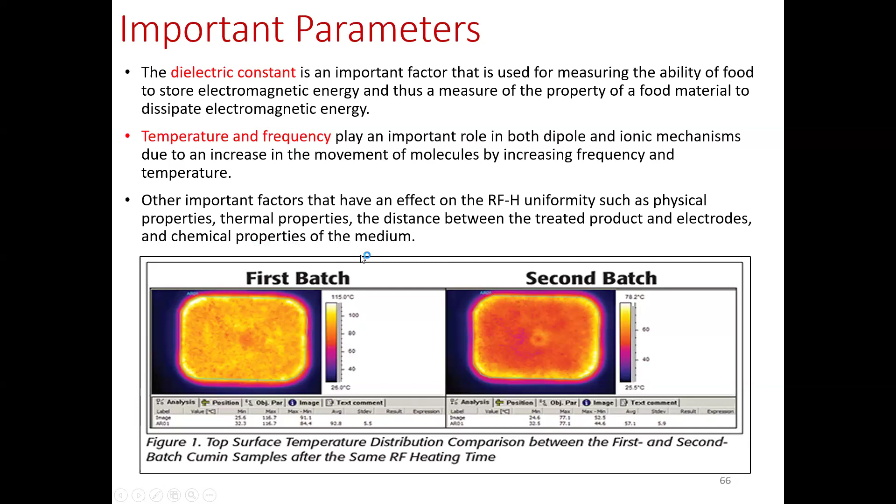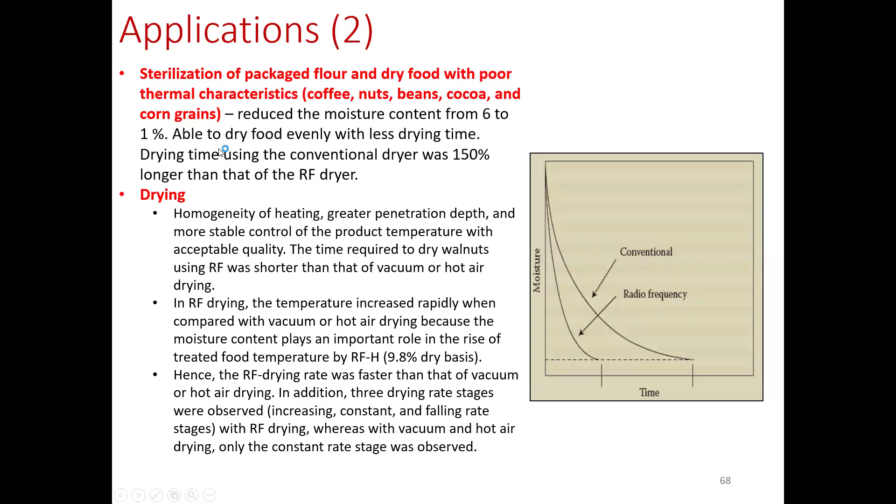Applications include using radio frequency heating for heating bread, blanching vegetables, thawing frozen eggs, fruits, vegetable and fish, drying cookies, sterilization of packaged flour, and drying food with poor thermal characteristics. You can dry coffee, nuts, beans, cocoa, and corn grains using this drying method.

For future research, we want to determine the optimum radio frequency, exposure time, and configuration for heating a single food item and a group of similar foods. At the same time, the relative impact of radio frequency on food quality and sensory attributes needs to be studied, with the goal of designing an optimum RF unit for a particular food or group of foods.

This heating method can be an alternative to pasteurization, processing of prepared food, and consumer reheating, with each situation having different requirements.

Hopefully in the future we would see radio frequency units replacing the domestic microwave, because RF units are much more efficient in cooking or warming food.

The current microwave has a single button control for different foods that controls the cycling of the microwave over time. So try to imagine having an RF oven with a similar single button control that can vary the frequency, duration, and cycling of RF in order to maximize the quality and health benefit of that particular food.

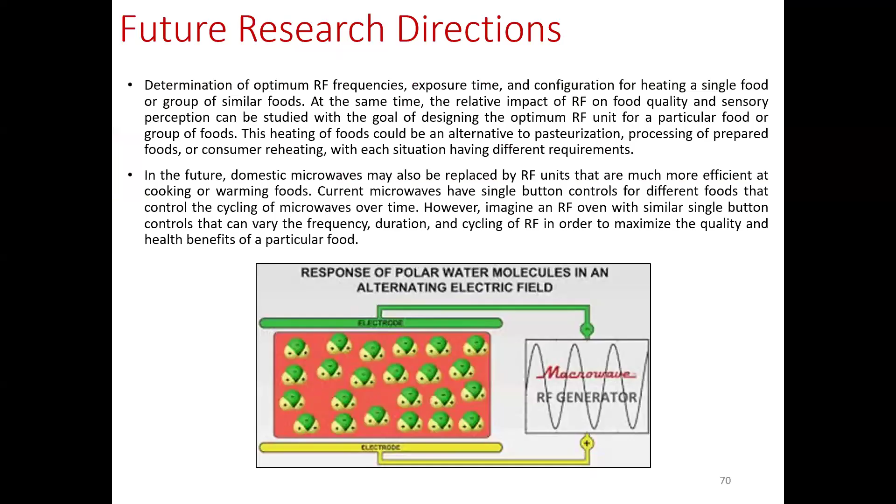I think that is the end of my presentation for today.